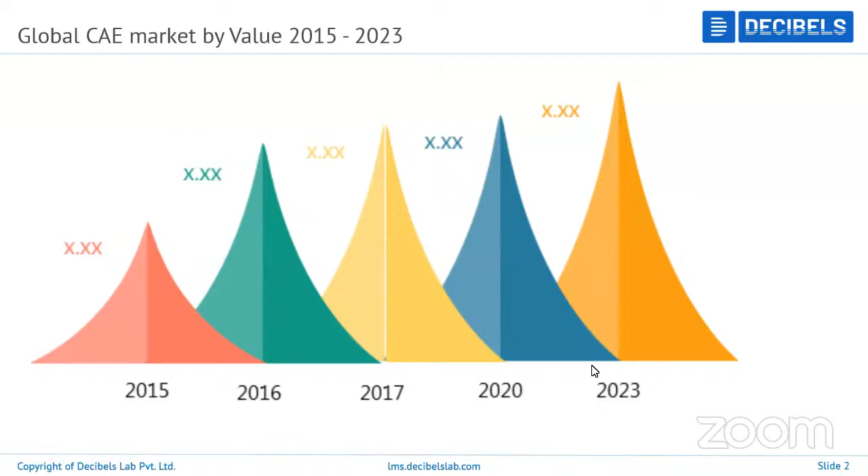Next, what are the major tools we use for CAE? The major players are Hexagon, Altair Engineering, Dassault Systèmes, BETA CAE Systems, and Autodesk. And we are interested in Altair Engineering. Altair is one of the companies providing major CAE tools, from finite element analysis to optimization. For example, HyperMesh, HyperView, Radioss, and OptiStruct are important CAE tools running in the market.

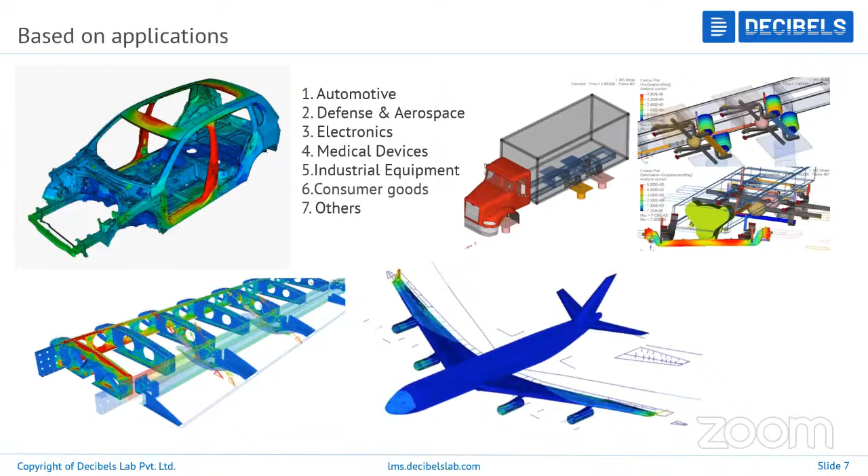And consumer goods; as I said, consumer goods may be household things also. Say, for example, washing machines, mobiles also, we are doing CAE analysis, like drop test, crash test. And for televisions also we are doing it. And it occupies other sections also. So these are the important areas where CAE is used.

Next, what are the benefits of CAE? We already know why the CAE industry came up. These are the important benefits of using CAE. First one is prototype testing, reduced engineering efficiency, optimized design, increased visualization, and reduced design cycle. First, I'll go with increased visualization. What does increased visualization mean?

See, when we are doing physical prototypes, we may not get accurate results. Or for getting a visualization result, a number of prototype tests will be required, and that will cost more also. But using CAE, if you want to do analysis for different kinds of materials, you can do it, so that you can visualize the results very closely between the different materials. And if you want to review or visualize the results by changing any property details also, you can do it. And the design cycle reduces, obviously.

So if things are done just in CAE by changing the material details, property details, and load details also, say, for example, first I need to apply a load of 10 kg. Next, for further cases, if you want to do it for 30 kg or 50 kg or whatever it is, you can do it in the software itself instead of doing a physical test. So these are the important benefits.

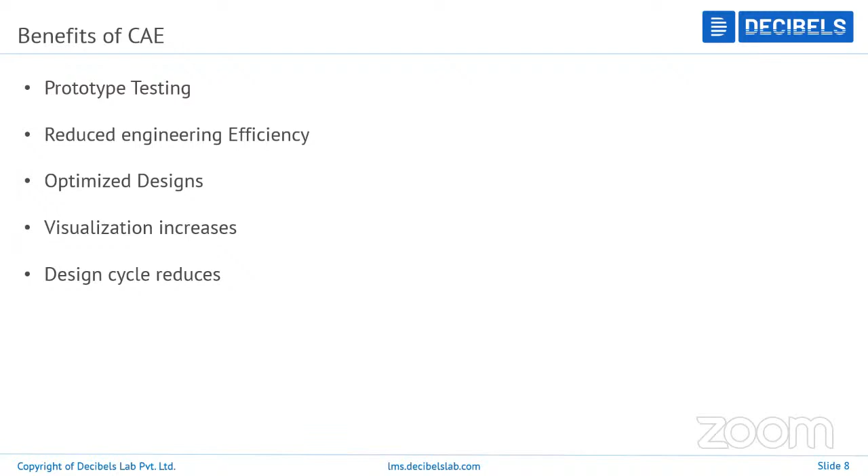Next, let me take one example: prototype testing. Here I have given a simple example. This is an air wing. To design this air wing, it will take months or years. After designing, if you are not doing CAE, and you send it directly, what happens? It may fail.

See, it has just been designed, and it is not verified how much load it will take, at what frequency it will fly, or what the different loads it can take are. If you are not using any CAE tool, we will not come to know what the end results are. If I directly take this air wing for prototype testing, it may fail at the very initial load, or it may get more deformation in different areas.

See, every time I'm taking the air wing, I'm applying some load or some vibrations. So again, it will cost more, and every time I need to build the air wing physically. To overcome this, using CAE software, the designer will give all the data, the design data and the material data. Using all the details, I can simulate this air wing and get approximate results in the CAE software.

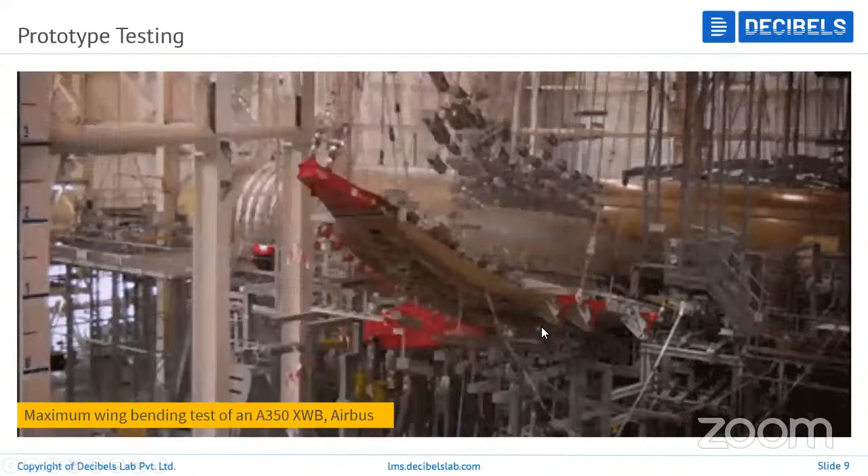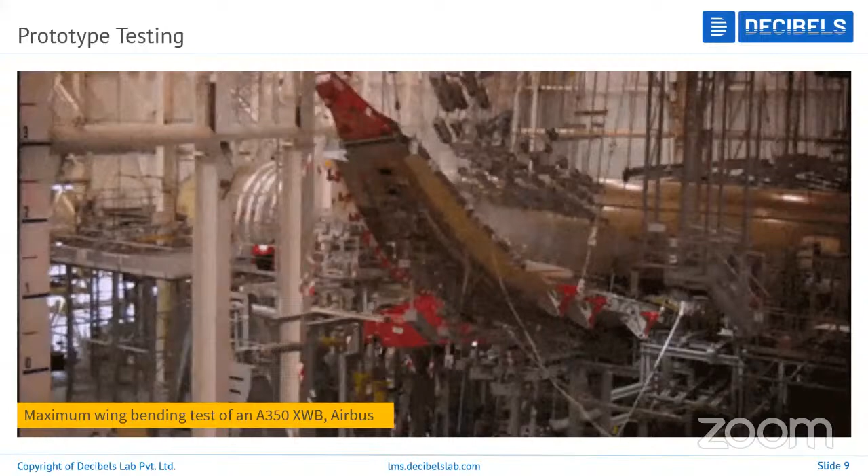In this area or this area, your component is going to fail, or what stress values you are getting. You can compare the values with the yield value and ultimate value. By looking at the values you got in the CAE software, you can compare the results with actual testing, and you can do some hand calculation for the same problem using the same boundary conditions and loads you are applying in the CAE software.

You can do the hand calculation for the same problem and compare the results between the hand calculations and what you have done in the CAE software. Both will have similar results. If not the exact values, you will get similar or approximate results close to the hand calculations. So this is the main reason why we use CAE in industry.

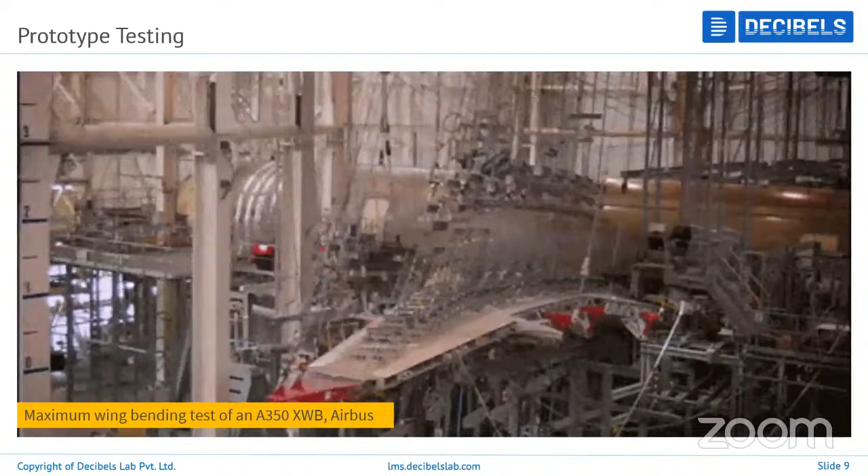Next, efficiency. As we have seen in the last slide, we can decrease prototype testing, so we are moving towards efficiency by reducing the number of prototypes. After doing some simulation, you can give your thoughts to the design engineer: this is the material you are using, and these are the effects you will get. You can show strain values and stress values, and the area where the assembly of the component is going to deform more. So you can work on those things, and obviously the efficiency is going to increase.

In the earlier days we were not doing any CAE; it would just go for the physical test. But using CAE, you can do some fine tuning before it goes for manufacturing or production. As I said, you can test for different load cases, different material properties, and different boundary conditions.

For example, you want to fix the floor of a car. Just imagine you want to fix it with 30 boundary conditions. Sometimes somebody will tell you that with the 30 constraints you are using, the component is going to be stiffer. So you can change the boundary condition within the CAE tool itself, instead of going for manufacturing and physical testing.

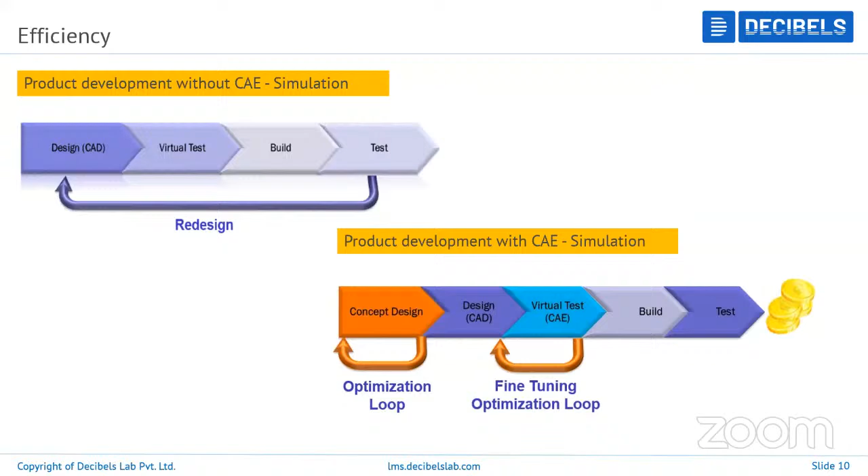So once everything is done, it will go for the build, then it will come for the physical test. Obviously, it will save manpower, it will save money, and first of all, it will save time. So using CAE software, the efficiency of the product and other things will be increased.

Next is, what is the role of a CAE engineer? So far we have discussed what the CAE industry is and the advantages of the CAE industry. Next comes, what is the role of the CAE engineer? So basically, the CAE engineer is not going to design any CAD models. He is not going to design anything. He will work on the product, or on the components which are already designed by the design engineer. So what is he going to do?

First, he will plan for the component. Just as an example, assume you are enrolled in some company. They have assigned you some components, door components, floor components, or any other component. First, you need to plan how you are going to mesh it, or how you are going to analyze the component. For example, if you have one square box, you need to think, for this square box, do I need to go with a 2D mesh or 3D mesh, or do I need to extract the mid surface? Or what are the critical areas of this component? What should I take care of before starting the meshing?

So first you need to plan, then the product design. As I said, the designer will be giving the product details, the design data, everything. For example, measurements he will give, thickness he will give, the material details he will give. So you need to design it.

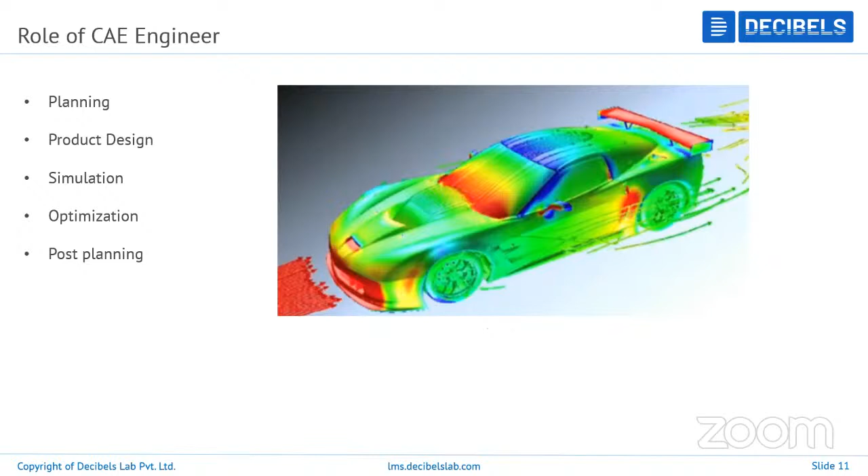Next, I have just explained what he's going to do from end to end. But what are the basic things he should know before he starts any project? First, he starts with meshing. The meshing tool is HyperMesh. HyperMesh is one of the major tools which most companies are using for meshing.

That is meshing, where we do 2D meshing, 3D meshing, or 1D meshing using the HyperMesh tool. Then applying the boundary conditions, in the sense where you are going to fix the component or where you are going to mount the component. This is the boundary condition.

Then the finite element analysis, that is what kind of analysis you are going to do, whether you are going to do OptiStruct, that is durability analysis, or crash analysis, then you need to run it, solution, and then the results. So after running any file, obviously you will get some details of the results. After running the file, you need to check the results.

In the results, what are you going to check? So we need to validate. Okay, I have run one file and I have received some different results files. Now I need to validate the results, or I need to check the results. So how will you check? For checking or validating the results, some other softwares are there, say for example, HyperView or HyperGraph. These are the tools with which we can visualize the results.

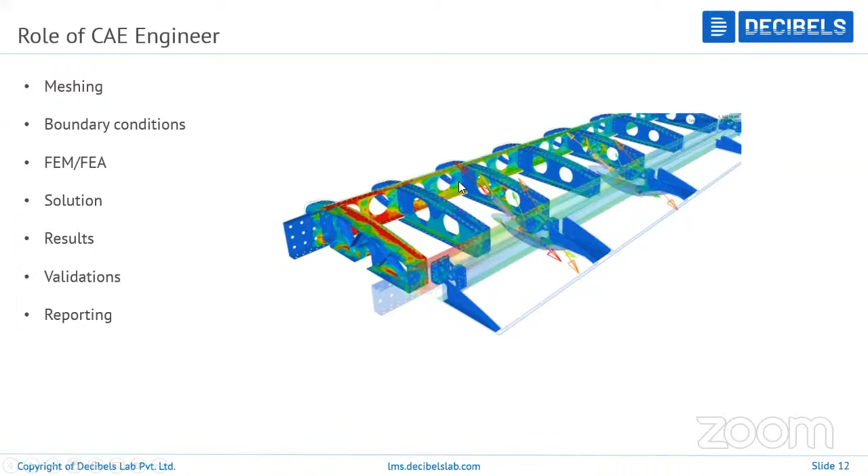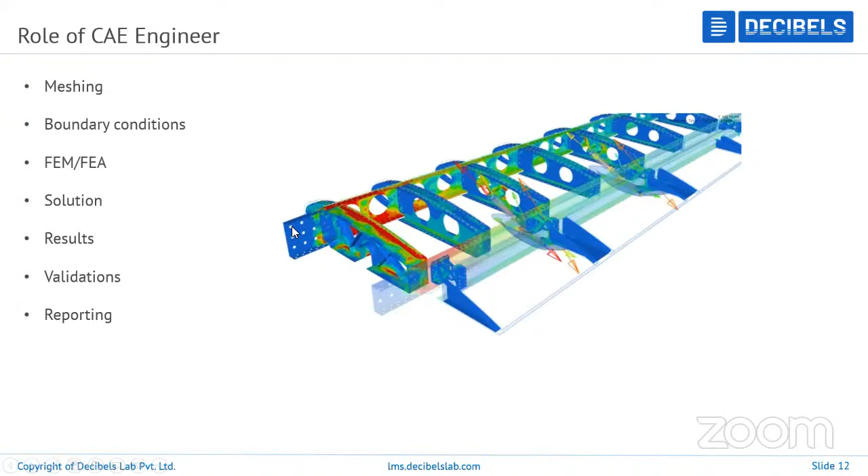Why? Because based on your results, the designer is going to finalize the product. Then it will go for manufacturing. Obviously we know after manufacturing, it will come to the component level, assembly level, and the deliverables. After the deliverables, if it fails in the market, it will come back to the design engineer. So the CAE engineer has more responsibility in doing the simulations.

Next is, what are the job roles in the current market? See, once you're done with any of the CAE softwares or CAE tools, you may get opportunities like FE modeling or meshing engineer, where we are going to mesh the component. Basically, when we join any industry at entry level, definitely you are going to mesh for 1 or 2 years. Why? Because only when you are meshing will you understand the component.

See, if I'm directly going into simulation, say one company has hired me and put me on simulation, you may not know what the important things are or what minor features the car has. See, the person doing simulation with more than 5-6 years of experience will just take the assembly, like any car assembly or door assembly. He will go with the assemblies, put some load cases, put the boundary conditions, and then start analyzing the component.

But when we are working as a meshing engineer, you will start meshing from the small component. You will analyze the component. Even for a simple component, you will get to know what holes it has, what the diameter of the hole is, what ribs it has, and what different features the component has.

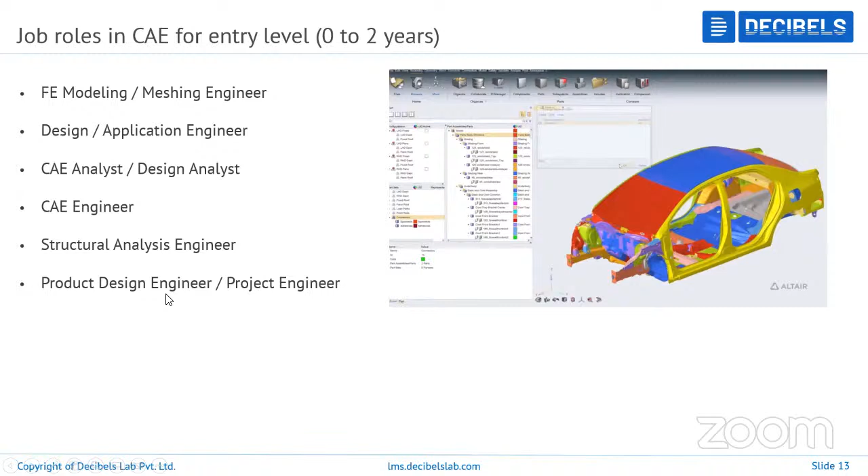Then design engineer, application engineer, these are different names based on the company you're going to join. Somebody calls it a CAE engineer or analyst. All these depend on the company. Somebody may call it an application engineer when we are using any CAE software. So application engineer, structural analysis engineer, product design engineer, and project engineer they may also call it.

Next is, what is the industry expecting from a CAE engineer? You have done some CAE course, or you have learned CAE. Once you join a company, what is the industry expecting from an employee? As I said, based on the validations and the reports of the CAE engineer, the designing team is going to push the data for manufacturing. So the industry expects a very high level of responsibility from the CAE team.

See, perform complex design analysis using computer-aided engineering. It means, for an entry level, as I said, you may work with 10 or 20 components or small sub-assemblies like that. But once you gain experience, you are going to work on complex assemblies, like the interior panel, which we can also call the dash panel, and light assemblies, headlight assembly, tail light assembly. These are the important and crucial assemblies in automotive parts.

So you need to perform the design and analysis. Analyzing in the sense, you may need to do some dynamic analysis also, where time and load come into the picture. So these are the important complex things you need to do.

Understand the customer's basic requirements and expectations. When you are going to design or mesh some component, first of all you need to understand the requirement. See, I have taken this box. Randomly meshing in this area, it is not possible like that. You need to understand whether he is looking for durability analysis, crash analysis, or a drop test. So you need to understand the requirement.

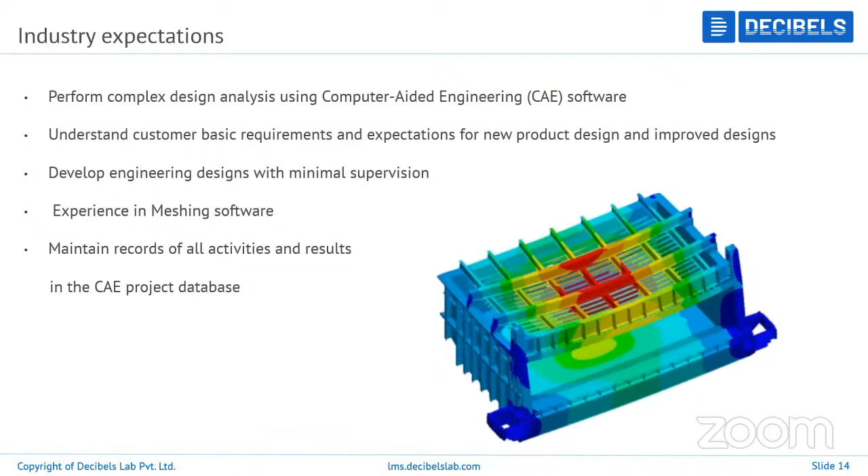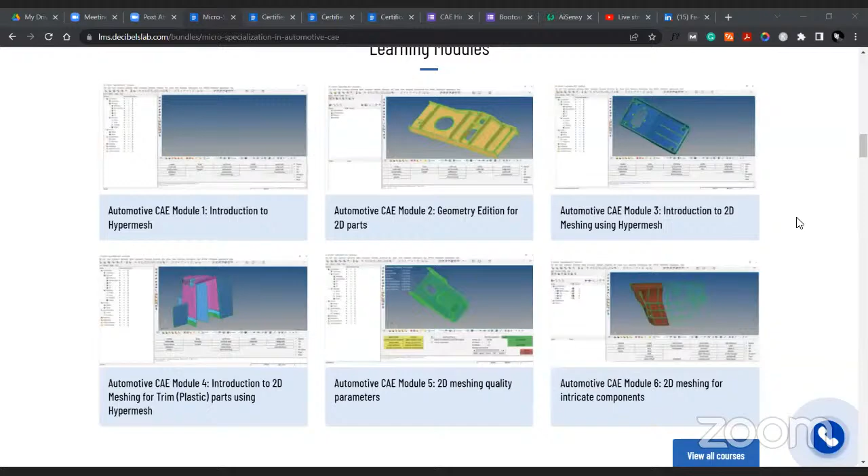Okay. Arjun is asking, is this useful for aerospace engineering? Yes, it is very useful for aerospace engineers also, where in the aero domain also, CAE has acquired a lot of space.